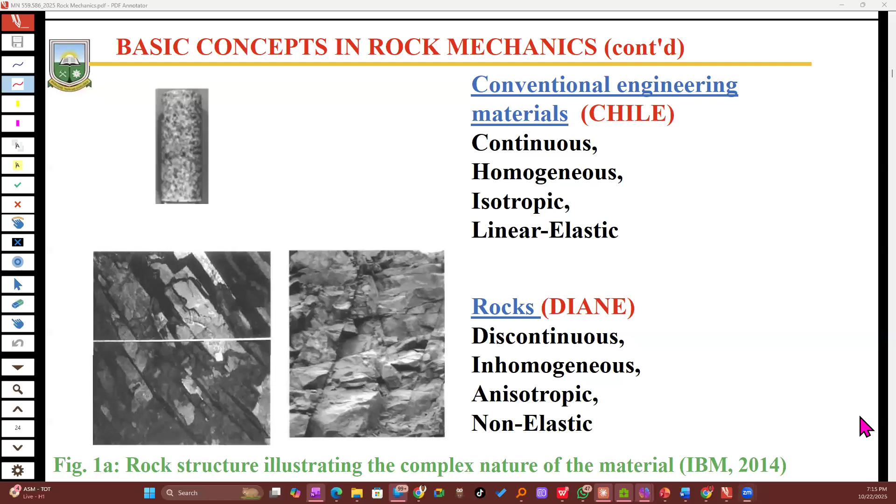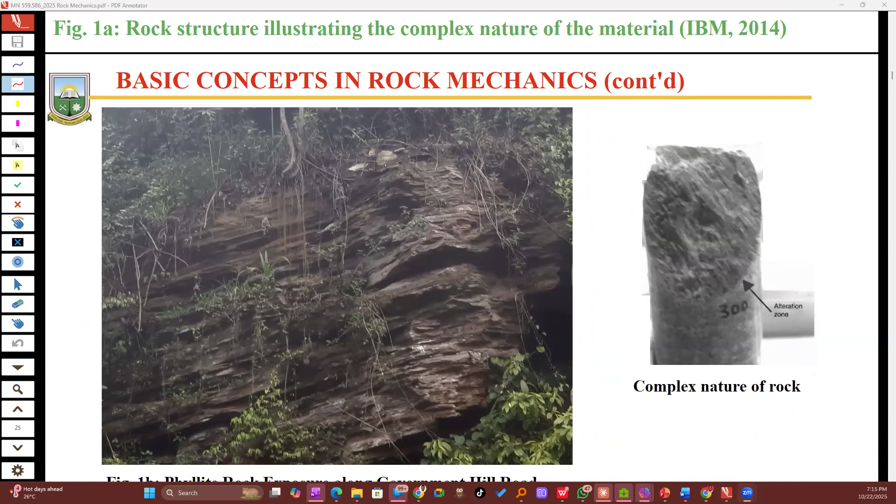This is also a typical image of an accessible rock. That is, if I have any rock mass that is exposed, such that I can get close to it and examine and see what the properties are.

So now, once we are talking about rock, we've talked about how it behaves and all that. It'll be very interesting for us to get to know some of its uses. Can anyone help us mention some of the uses of rock? You tell me one, then we move to the next person.

Who will start? One use of rock. For construction, Doc. For construction - you see, that is the issue. Assuming I request for 15 marks and you just say construction, what can you gain from that? There's a lot within construction, so if you just say construction, you've lost the rest of the marks. So be specific.

How will I say it, Doc? The use of rock for road construction - they use boulders for dam construction, for filling routes and other muddy places, for concrete works, for rock manufacturing base, for tiles, aggregates for road base, cement aggregate manufacturing.

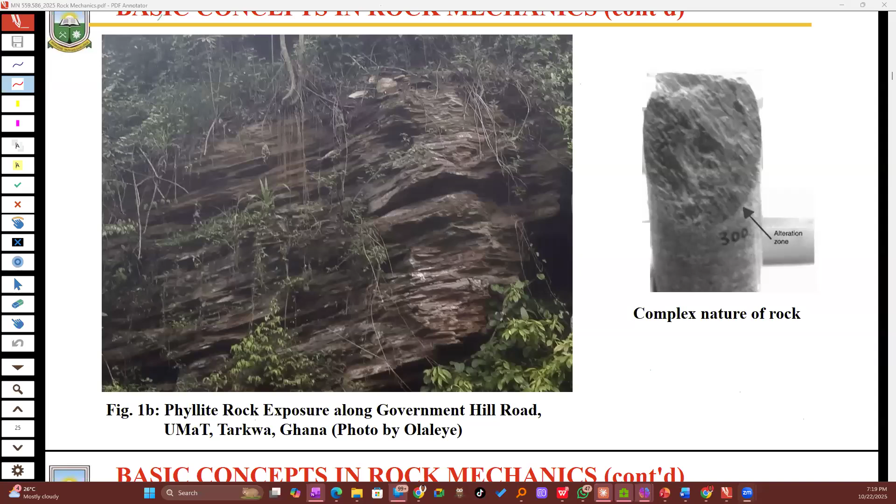So in agriculture, we add rocks to the soil to reduce acidity, like the lime rocks. Okay, good one, nice. Doc, some rocks can be turned into useful metals - beautiful, good. Then the preparation of sharpened knives - nice one. Thank you so much.

It means we have various uses for rock, and we've been able to exhaust almost everything I have on this slide. So we move on to the next one, looking at the economic benefits of rock. Who can state some of them?

Mineral - so we obtain minerals from rocks. Which other thing can you mention? Tourism - we earn money from that. What else? Aesthetic. Doc, sea defense. We are looking at economic benefits, importance. Mineral extraction, which we sell and then earn from it. What again? Quarries.

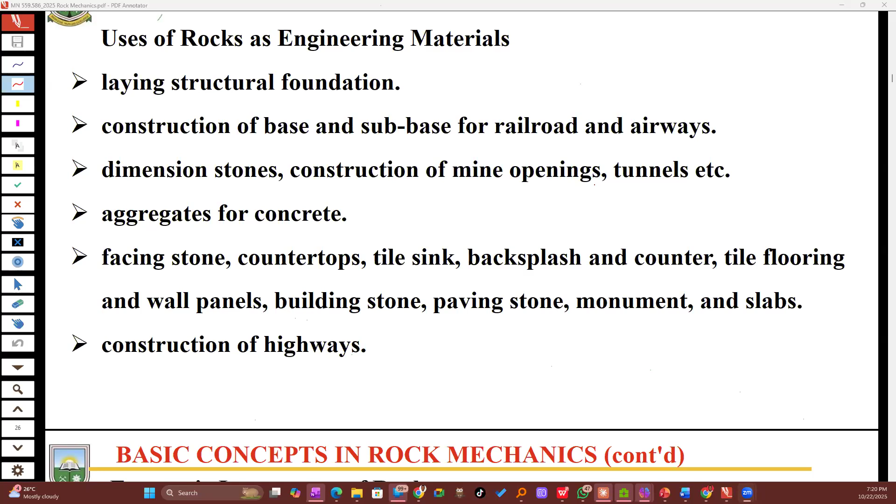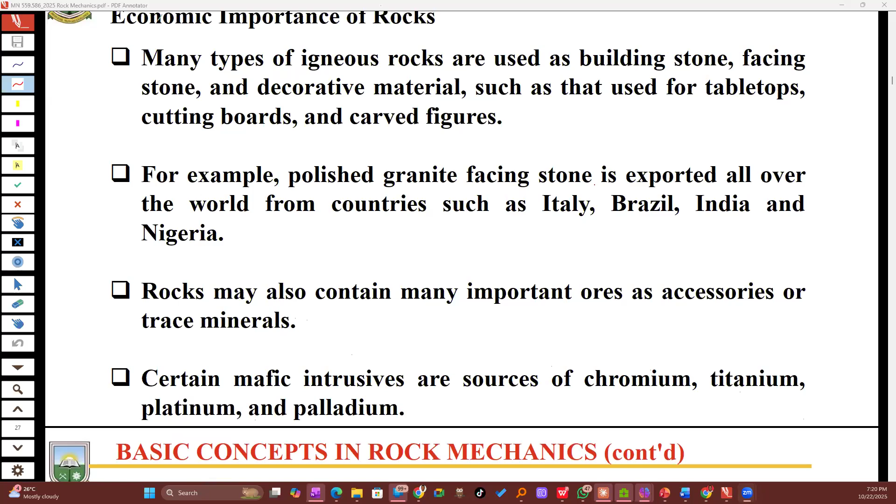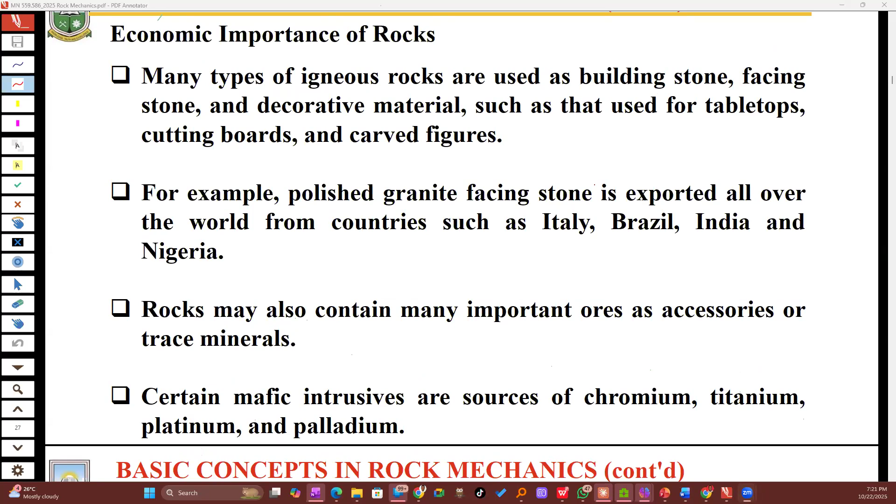So we are looking at the various rock types that we can use for varying things, like someone mentioned, for its beauty. Doc, can I say something? Yes. It also determines the financial ability of that geographical area. Yes, it's true, good. Then sometimes when we extract minerals from it, we can sell these and then earn royalties as a nation from it. All of these things are economic benefits.

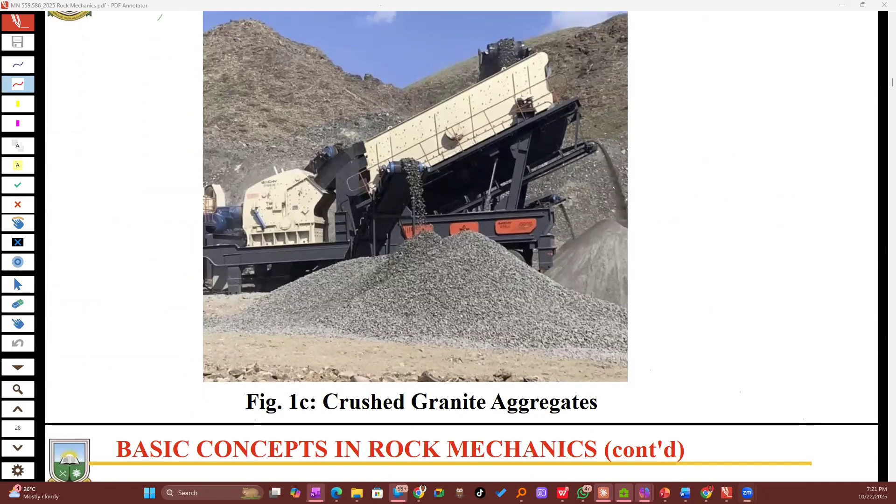It provides us with some employment, just as many of us, for which reason we are inside this class now. So these are some rocks, granites being crushed into finer aggregates for use. These are other uses of rocks - you see them, there are many, tons of them.

And that is what we can term as the intact rock. So when you are far away from the rock material, or looking at a larger area of the rock material, there are so many features you can see. Please mute yourself if you are not talking to us.

If you are looking at a wider view of an excavated surface, you will be looking at all the physical properties that define a particular rock material. You will see them. But as you narrow in deeper and deeper, you will be able to single out certain portions of the rock that have no discontinuities at all.

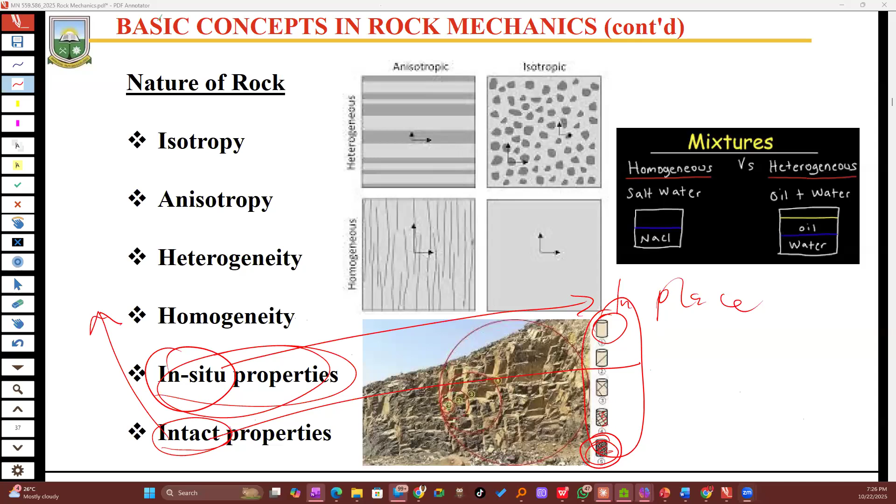All right, thank you, Doc. So we move on to our next topic.

What are some of the things that can define or determine the strength of your rock? The very first one is mineralogy, the various minerals or elements we know that exist. For example, if we mention the first 20 elements, or some of these minerals, every one of them has certain peculiar features.

It is these features within them that give us the various types of bonding that exist in the material. So when I have an element or rock material made up of minerals that are already competent by nature, if such minerals come together to form a particular rock type, then of course we need to be certain that we are going to have a very competent rock. So depending on the type of mineral making up a particular aggregate to give us that rock material, the strength might vary.

Then we have the mineral assemblage, how these various minerals came together.

Sometimes due to their orientation, whether they are rounded or not, their assembly can also influence the strength of your rock material. And then their particle sizes—are they finer? If they are very fine, at the end of the day, it gives you a very solid rock, free of so much void or empty space within it. So the strength of the rock is enhanced when you have finer particles.

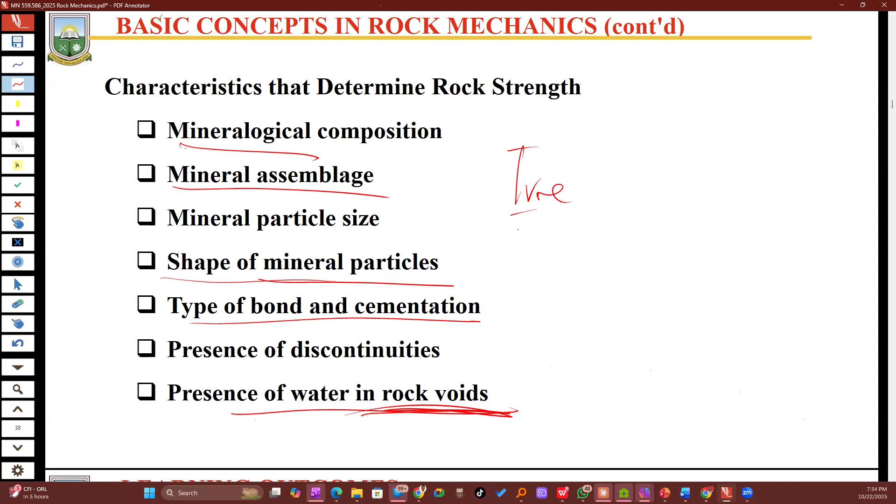So we are moving to our next phase - I think we should have ended here yesterday and we didn't. With the next set of slides, I want us to look at how rock mechanics programs are being implemented, what goes into it, and then the field application of rock mechanics, which I've already mentioned a few.

Doc, I have a question. Yeah, carry on. Doc, I want to know the difference between the mineral assemblage and the type of bond.

So mineral assemblage here could be if I have different types of minerals coming together - maybe I could have a particular rock type. Let's mention any elements in the periodic table coming together to give you a particular rock type. Remember we said certain rock types come together as a result of molten magma or whatever that have transformed to give us a particular mineral. So if I have a particular rock sample, let's say it's a dolomite rock, I have calcium present in there and I have sulfur in there - all of these are minerals coming together to give you a particular rock type.

The way they are assembled, the type of minerals that assembled to give you that rock type, can affect its strength - that's what we mean. And the type of bonding is, once I have that amalgamated type of rock with several elements or minerals present, that is now one piece of rock. I have a different type of rock that is also formed differently, and when they come together, that is bonding.

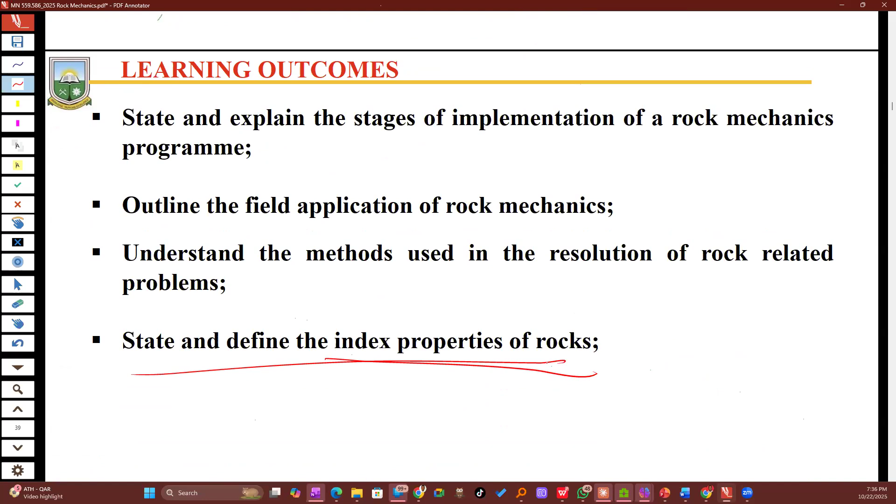I said we would then look at what we call index properties of rocks, and this is where the game will start, into our calculations.

The engineering problem posed in all structural designs mainly is the prediction of the performance of the structure under loads that are being imposed on it during its prescribed functioning. So if I say there's a problem, what is that engineering problem? I am trying to look at a particular design - it could be the stope you have designed, it could be your benches you designed and told us we should excavate the space like this to have our pits. That is a structure that you have designed.

So the problem here is us trying to find out, to determine, predict how well this particular design you have proposed will perform. As an engineer, you are trying to see how the design you proposed is going to perform in the presence of your excavator on that bench, excavating day in and day out, the blast you will be throwing on another side of the pit, and then the various activities going on with the dump trucks.

These are the loads we are talking about - we are trying to predict the performance of a design under all of these circumstances. The moment there is that trigger, you won't sleep, you will want to find out. So a problem has arrived, and you will then want, as the geotech officer, to do your various investigations to find out why. So rock engineering is concerned with the application of the principles of engineering mechanics to design the rock structure generated by mining.

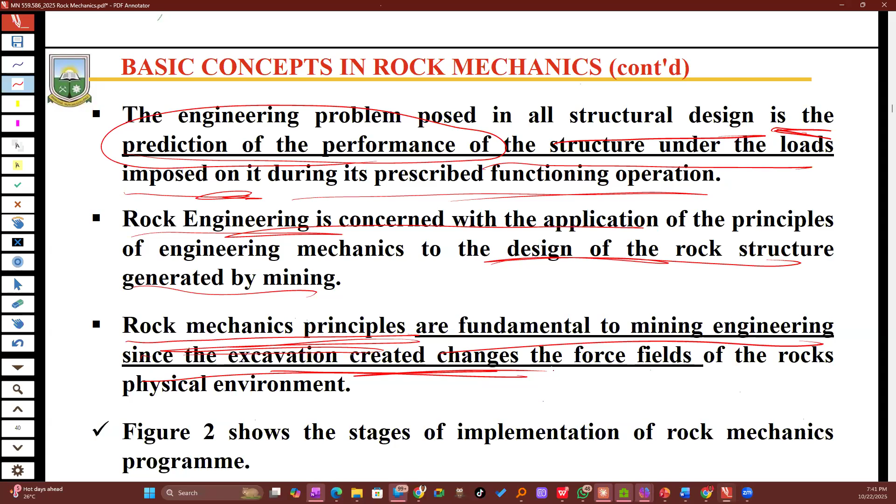Because we want to look at this and resolve some of these issues, we study rock mechanics and apply those principles to mining engineering, where our excavations will be causing disturbances to the various force fields that exist within the rock in its physical environment.

So if I want to implement a rock mechanic program, how do we go about it? To implement a rock mechanic program, it goes through five phases: the first is site characterization, next is model formulation, then design analysis, then rock performance monitoring, and then retrospective analysis. We'll take these one at a time, and when we get to the other slides we can brush over them.

I'll explain site investigation here. It's just like trying to set up a business - you go out to find out, will this business be lucrative? Will people patronize it? Who will be interested in this thing I'm trying to propose? When you study the market or do that market analysis, you are doing site characterization - bringing together all the various entities and properties that you think will favor the idea you have.

Translating this analogy to your rock you want to mine - during the very early stages when diamond drilling is going on, we don't throw away the rock sample. We pick these things up, take them to laboratories and test. The geologists will be around to characterize, together with geotech officers, to help us characterize the various properties we've seen. Once the core is out, we examine and study: at what depth did we see a crack? Is this crack going to extend north, west, or deeper? You want to investigate all these properties, and that defines the various types of rock that you have.

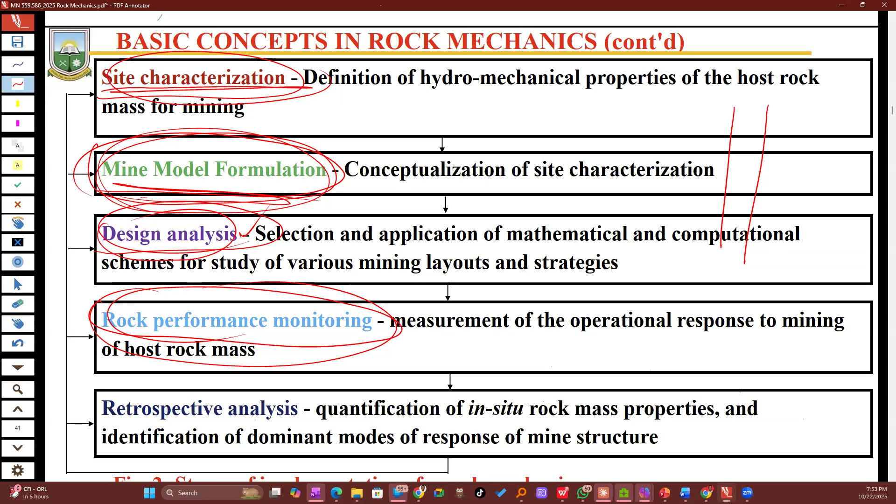So we are here. What are the objectives of a rock mechanics program, or rock mechanics? Why do we need to study rock mechanics? So irrespective of the excavation technique you are adopting for your ore extraction, it is possible for us to come up with 4 key things that will direct us.

So the very first one, why we do rock mechanics, is to ensure the overall stability of the complete mine structure, as defined by the orebodies. So the stability of the entire structure is our core goal, and these things are defined by where our ore is, where we have mined and created empty spaces, and what is the nature of the adjacent country rock present. So you are focused on overall stability, taking into account all these factors.

Then the next one, it's your duty as a geotech officer to study rock mechanics and help us safeguard all our major service openings throughout the designated life of the mine. So if we have created a portal where we enter a decline, we expect that so long as Gold Fields stays, so long as Tarkwa mine is there, that access route should stay because it is our main entry point into our production phases. We don't expect that we finish and tomorrow, once we get in and come back the next morning, it's closed or collapsed. So it is your job to protect that.

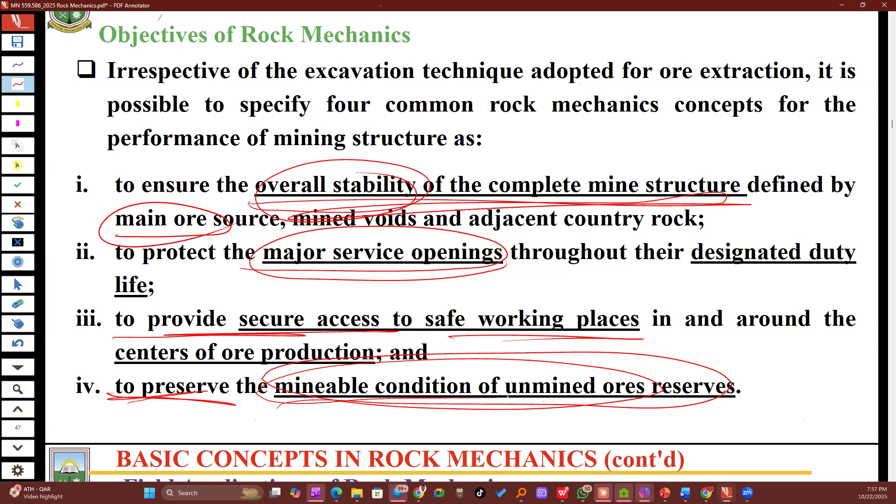So in the applications of rock mechanics, we want to determine the physical and mechanical properties of rocks. These are some of the things we do. We investigate the condition and stability of the area.

So every day you are there on the field. You don't leave your job to national service people or interns. If you do that, they will go and record 23 as 32, and you'll use that for your records. Of course, if you do that under supervision and have foresight of what is happening, you can detect outliers and make proper decisions. But where you relent on your job, at the end of the day, you will mess up.

Then you study rock pressure and its occurrence in openings - it is your duty. Then study rock subsidence and its effect on the opening: what is the tendency of subsidence in the mine or opening you have created? And then study the processes of fragmentation of rock during excavation. So you visit the face when excavation is going on to see what is actually happening - it can give you an inferred idea of what to do.

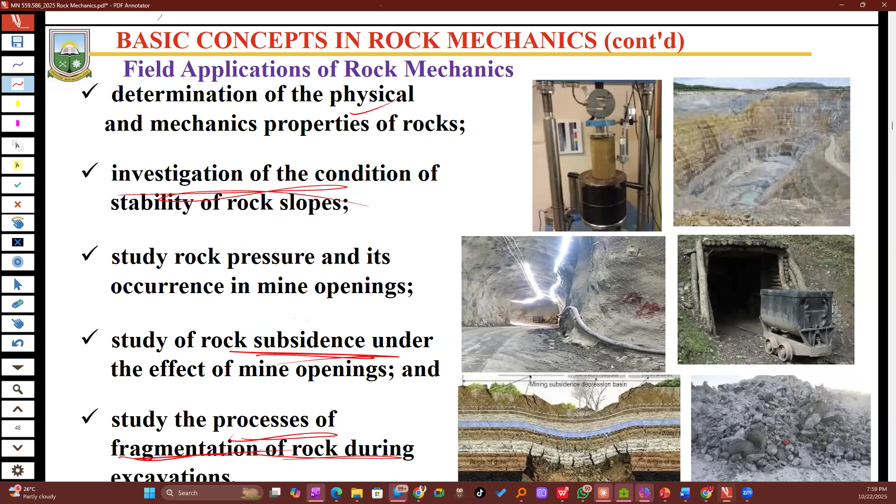So how do we resolve rock mechanics problems? The first one is through experimental methods - experimentation. We observe the behavior of the rock during production stages, then make decisions when we get to the office. You can also go there and look at the behavior. We conduct certain tests, termed the physical and mechanical properties of the in-situ rock, on site. Again, we can determine the physical and mechanical properties of the rock by taking samples to the lab - that is also experimental.

Then we study the physical and mechanical properties that take place in layers of rock and the effect of the mining process. Sometimes, just like this bottle has distinct lines around it, an excavated surface can have distinct layers. It is your duty to see how each of these layers differs from the other - layer 1 will have different behavior and conditions, and layer 2 will differ. So the condition of one side of the pit will differ from another side if it behaves this way. It is our duty to do experiments on each of these rock layers and make decisions.

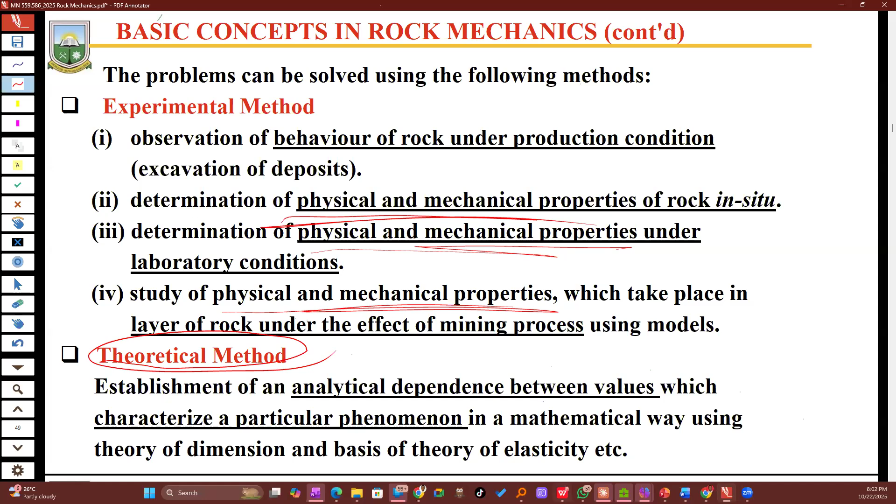But then, the moment you are able to find the underlying differences, the principles and assumptions they used in designing that software, that will stem from the maths that you have studied. That is the theory we are talking about. So we move on to the next phase.

It is getting interesting gradually. Any questions so far?

Okay, nice one. So, indexing. What is index property? Index property here is a system that is in place to help us find out, based on certain key things. They are more like properties that we have, a naming system available for us to test one by one, parameters that we can take one by one.

Depending on a particular project we want to undertake using our rock or soil, we then say, based on this project, maybe I want to create a platform. Your manager tells you we want to move our mine planning office or technical services office to this side of the mine. So at that moment, we need to carry soil, transport soil to that place, get some rock samples, prepare the land, overlay it with soil, and then place our machines. Based on the type of load you'll be dealing with, it will inform the type of soil you'll be interested in for the load and haul team bringing to that site.

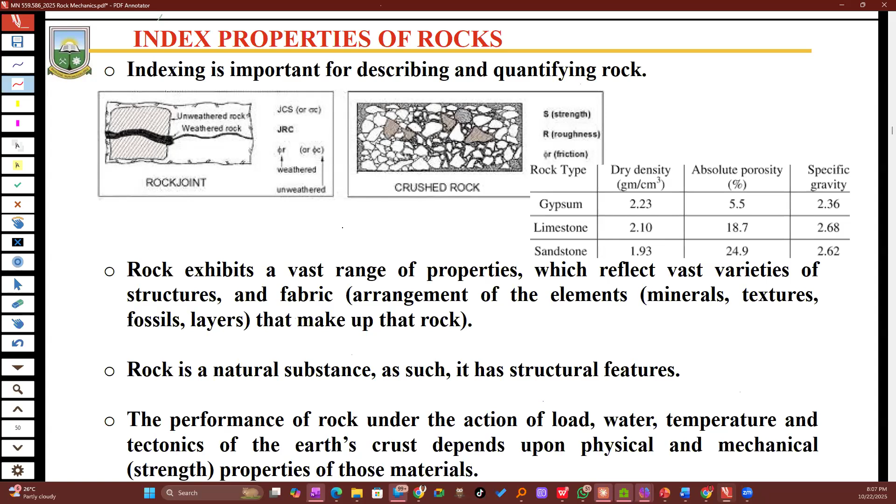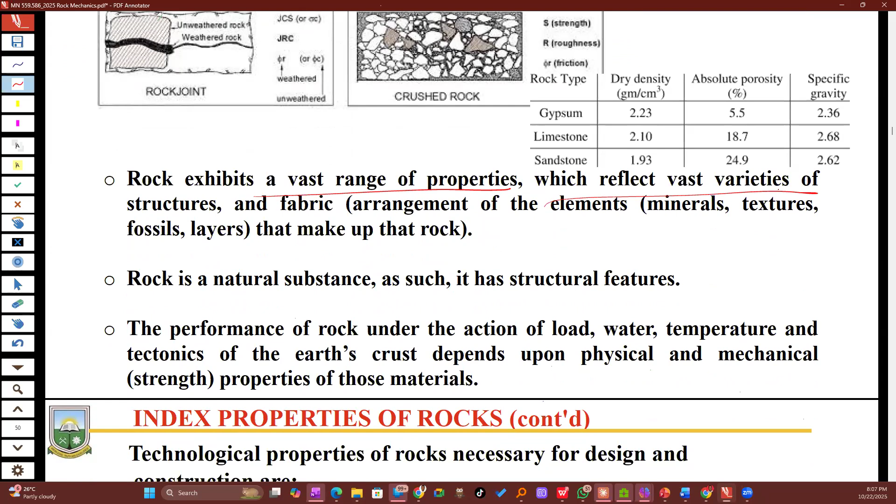Rock exhibits a vast range of properties, which reflect a vast variety of structures and fabric. Fabric refers to the arrangement of the various elements that make up a particular rock type. The rock in its natural state comes with several features, properties and parameters, which we have to bring together one by one. When they all come together, that's where they will make sense to us.

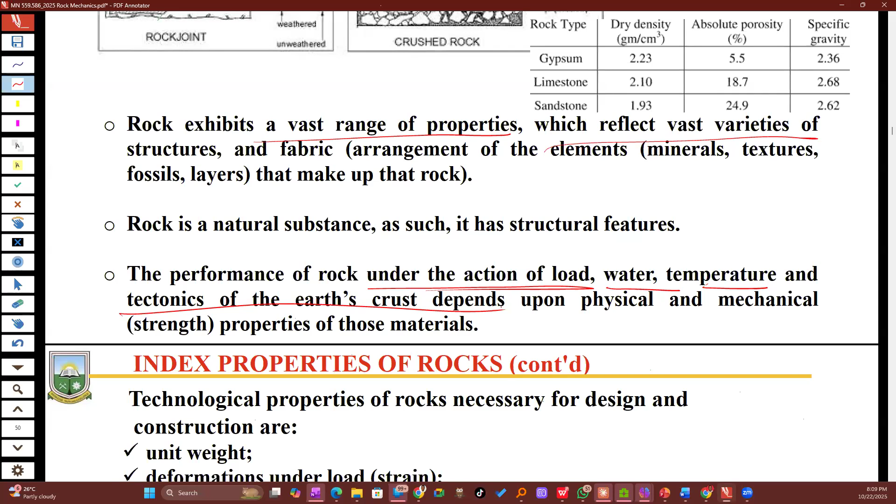The performance of the rock under the action of load, water, temperature, and tectonics of the earth depends upon the physical and mechanical properties of the rock material. How your rock behaves when load is applied depends on its physical nature and then its mechanical nature. The mechanical nature is more about the strength components of the rock, that is, when I exert force on it, what will happen. You intentionally exert load on it to see what happens, whereas the physical property is more like observing it, and using that as a criteria to slash certain things off even before you start the serious business.

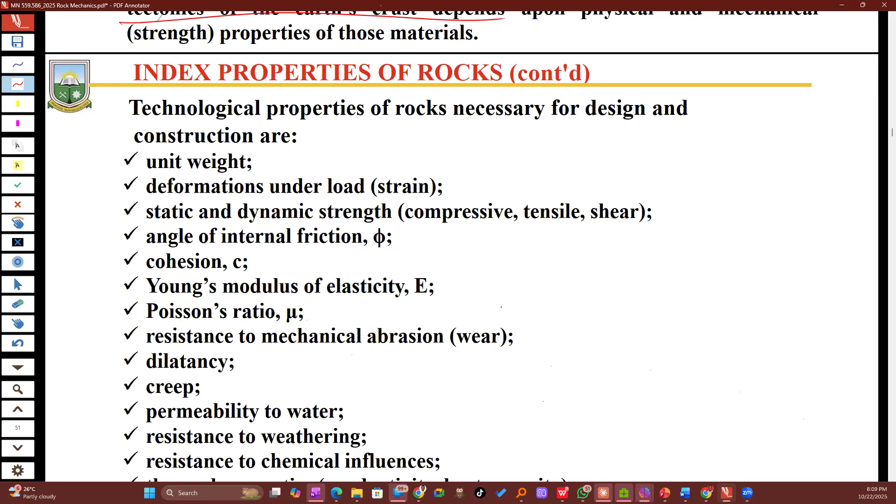These are all things that define the properties of a given rock material. There are many, so we'll pick them one at a time and describe where there's calculation, and go along. We are categorizing them into physical and mechanical, starting with the physical properties.

The physical properties are the properties exhibited by rock as a result of its inherent characteristics. Physical means they are more like inborn, they are inborn of the rock. So I see you and I know you are fair or dark, these are things I don't need to conduct a test to see. I fetch or pick rock samples and if they are wet, I can easily tell that they are wet. These are things we term as the physical property.

Depending on the characteristics of how they were bonded, rocks can be classified as being hard, soft, or loose. So the type of bonding that exists between them lets us identify whether they are hard, soft, or loose.

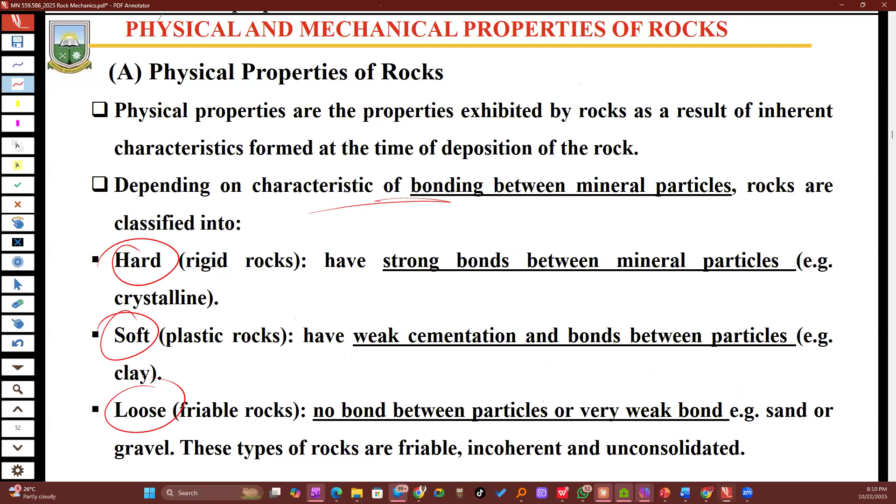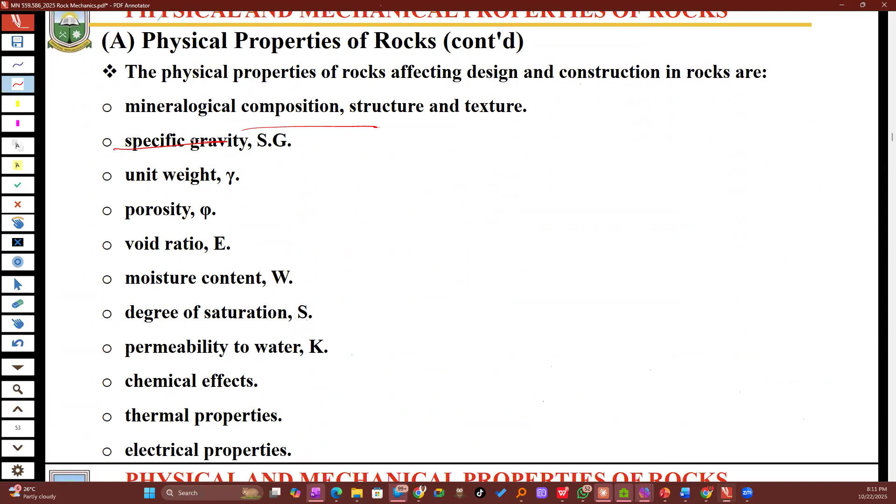Then we have the physical properties. You saw that long chain of properties of rock generally, and now we have divided them by looking at physical, and then we will look at the mechanical part of it. The physical properties stem from the mineralogical composition. We are looking at specific gravity, all through to electrical properties, which we shall pick one at a time and talk about.

The very first physical property we want to talk about is what we term as moisture content. In other books it is termed as water content. What is it then? We are interested in finding out, with this rock material brought to the lab, how much water is inside the sample. The amount of water present in a particular rock sample is what we term as moisture content. When we pick the sample and determine the amount of water that exists in it, we term that as the moisture content, and it is expressed in percentage.

It is the ratio of the volume of water to the bulk volume of the material. Bulk volume is, if you brought a material, let me put this in here and cover it up. Assuming you brought this to the lab for us to test, this is the sample you brought, so this is the bulk. If I go ahead and calculate the volume and mass of it, I am calculating the bulk mass of the sample and the bulk volume of the sample. So the bulk refers to the whole sample as it is, without doing anything to it.

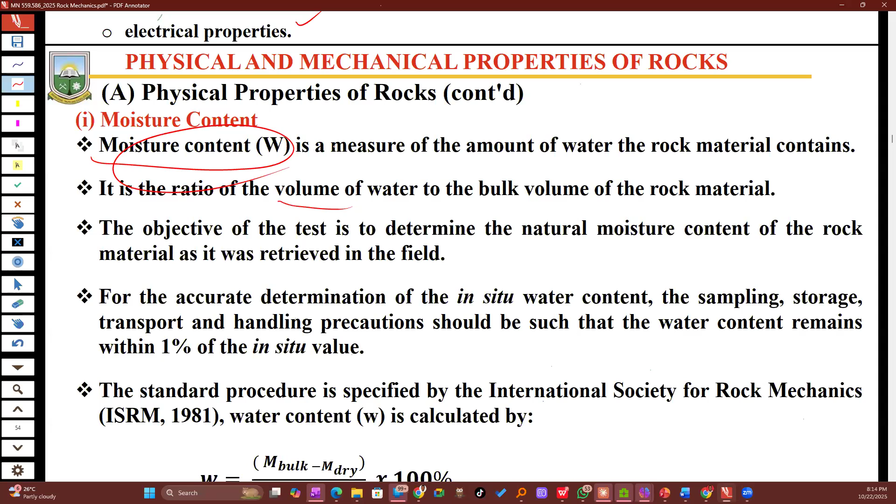Then we have another thing called specific gravity. Specific gravity is more like a measuring tool that helps us determine how heavy something is in relation to water. So I want to determine how heavy this mouse is relative to the weight of water.

The assumption here is that water is a standard material that doesn't change at a particular temperature, irrespective of your location in the world. So we are using it as a relative measuring tool, knowing its mass. We want to compare all other material to it. And we know the density of water is 1 gram per centimeter cubed.

So the moment I pick any other material and I know the density of that material, let's say it is 3, already I can say this is heavier than water. So the moment I put it inside water, it will sink. Specific gravity helps us determine the relative difference, or how heavy a substance is.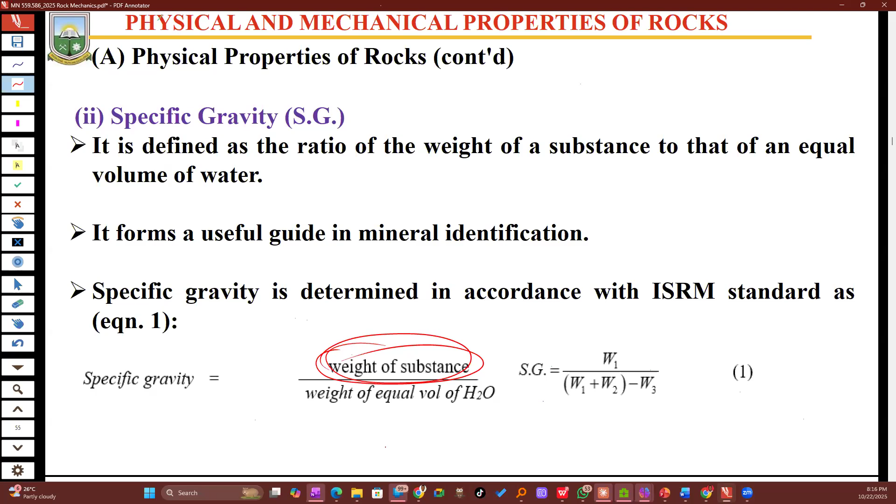And how do I get that? I need the weight of that substance. The moment we say weight, it means we are considering acceleration due to gravity as an element here. So it's the weight of the substance over the weight of an equal volume of water, and that gives us specific gravity. It's the same thing we are using this bottle of water to determine. So if I have the density of an object over the density of water, again I am getting specific gravity.

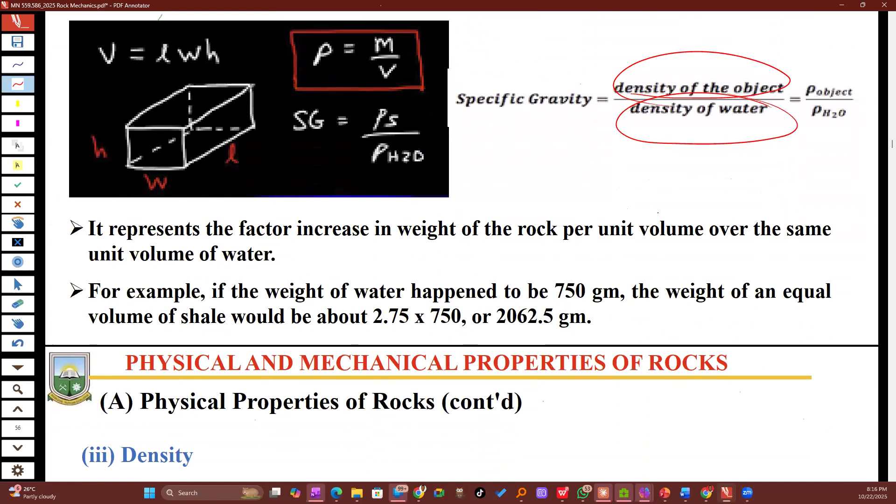Then we have another... Hello? In specific gravity, why do we ignore the pore spaces?

The pore spaces - you are looking at density. If you are using the volume of water, or the weight of water, or the density of water, depending on whether you are using bulk material, the pore spaces are present. So we are looking at density, and density could either be the dry density or the bulk density. So it doesn't specify whether you are using it with pore spaces or no pore spaces. That's what's happening here.

Yeah Doc, you made mention of the density and mass, and also that for specific gravity we use the weight. But I know from the various lab measurements, the in-house specific gravity we do, we rather use the mass, we don't use the weight. So I said you can use the weight, and when you are using the weight, it means you are incorporating acceleration due to gravity. I emphasized that. Are we clear? Well noted. Good, well noted.

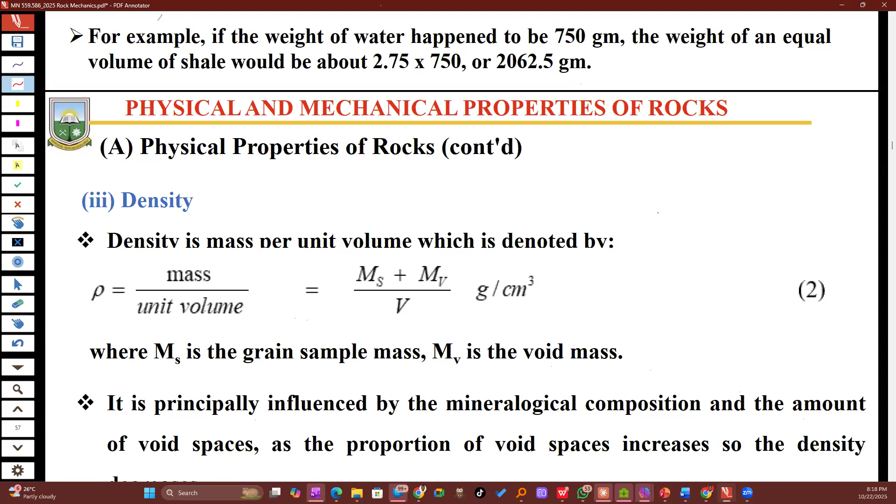Then we have another thing called... density. What is density? In simple terms, we have been saying it is the mass per unit volume of a substance. But what is it really? Let us try to make it quite simple and self-explanatory.

Density is just interested in how packed a substance is. So assuming I pick this box again, and assuming this box is filled with sand or it's a rock type, I want to find out how packed this particular substance is in terms of its packing behavior.

So if I cook 1 cup of rice and then ask a friend to come and just fetch a ladle, depending on the amount of pressure the person uses on the ladle against the saucepan, the quantity of rice will vary from another person's ladle. So we are looking at the packing behavior of the tiny, individual particles that make up a particular substance, and I want to know the solids part of it against the volume of that substance - the mass of that packed material against its volume.

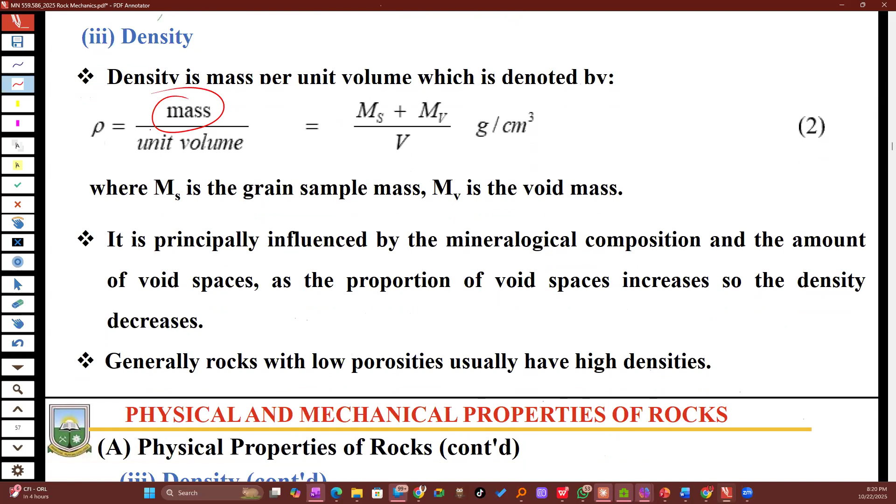So the types of densities that we have: bulk, saturated, and dry. I want to add the dry to it. So I'll pick them one at a time and explain. I am starting from what I know you will know. From there, we get to the others.

So let us start from the dry. When we say dry density, using the same analogy, I have this. The black substance in here is water as usual. It hasn't changed. And this is a container, which is a rock sample Mr. Kosa brought to us to test for him.

When you bring the sample, and I want to know the density of this substance, if I don't do anything to it, just as fresh as he brought them in the sealed rubbers, I just go ahead. What is the mass of this box? I didn't do anything. I just weigh it. Pick my tape and check the volume of it, the length, the breadth, and the height. I calculate and I get my volume.

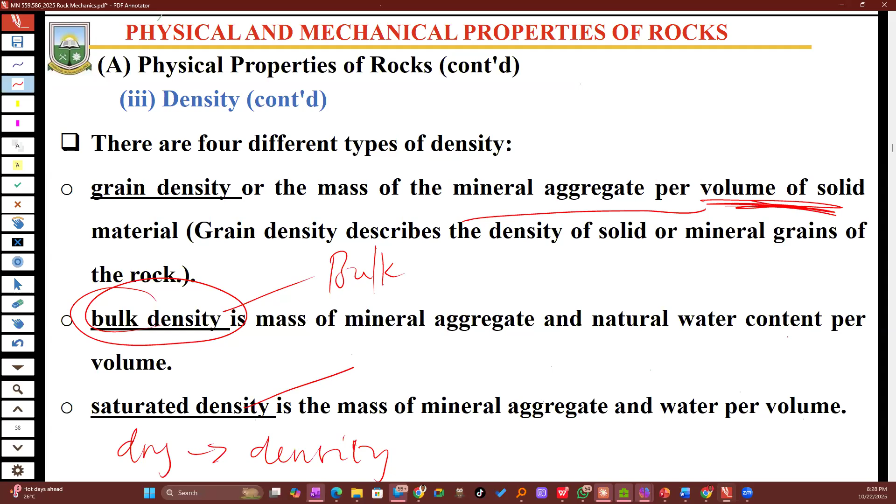So you check your water content. If where I am going to use this material is already a waterlogged area, I don't expect you to bring me a substance that already has about 50% water inside it. No, I wouldn't be happy with that. So that's why we work on some of these parameters, or physical properties, of the substance.

The International Association of Engineering Geology came up with a table that helps us classify and describe by words the various types of material. We have class 1 to 5. So if I have a material that has, without water, a dry density greater than 2.75 megagrams per meter cubed,

then this type of material I'll say is class 5 material, and I will describe it as having very high density. When your material has a high density, it is a trade-off: it means it has less empty spaces, so there won't be so much void space inside that substance. So you have lower porosity, which is also a physical property we shall describe very soon.

And we have class 5 all the way to class 1. Class 1 is where your dry density is very low, after taking away the water and checking the mass divided by volume of your substance. Once you have that, you say your density is low. The trade-off is that you are going to have more empty spaces inside the sample, which leads to a very high porosity value of over 30%.

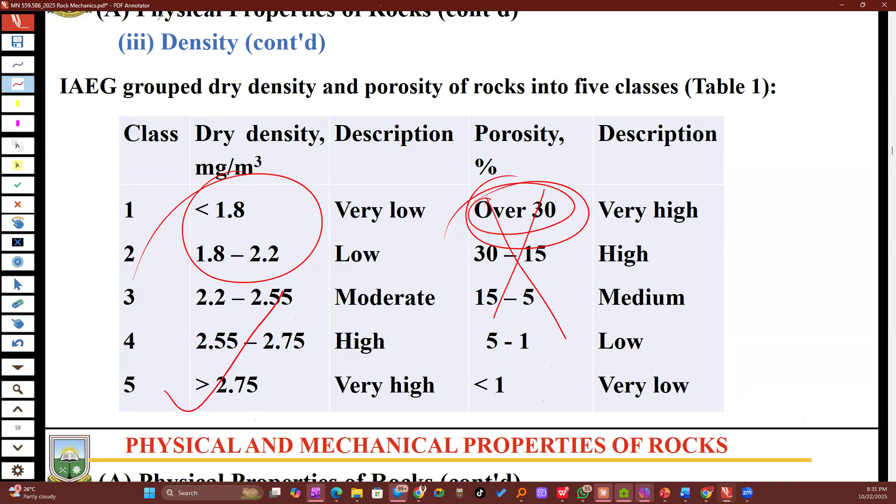Then we proceed. Density is used in various places, and we can also use another medium to determine density of a material. If we know the temperature, we want to determine the density of a material at a particular temperature - it is also possible. All we need is to determine the coefficient of expansion that exists when there's contraction and expansion within the material as it conducts heat and begins to contract. We want to measure that difference that always exists, and that is the coefficient of expansion of the rock.

If we get to know that, that is what we are putting here. Then, what is the density of the rock when the temperature was 0? We know that. When the temperature began to rise to say 30 degrees, what is happening to the rock? If we are able to determine the coefficient of expansion at that 30, then we can easily determine the density of the material at 30.

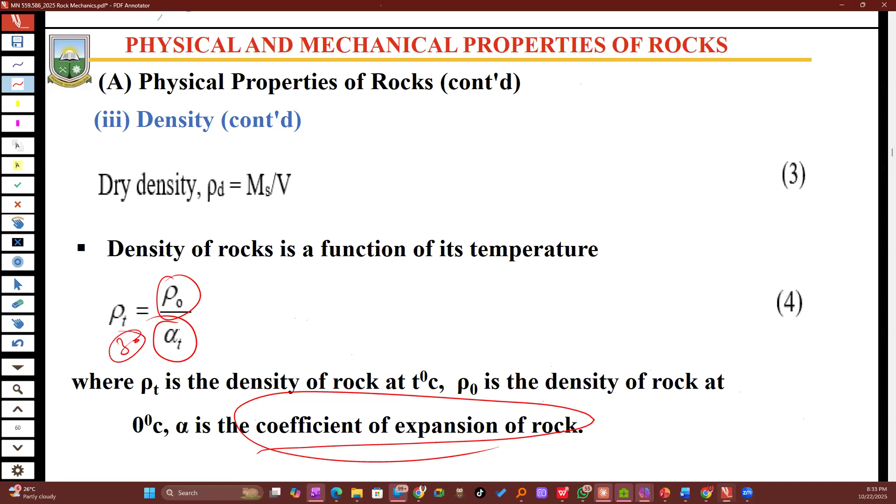So mass density, we know and have established already that density is one of the key things we use in determining the specific gravity of substances like our rocks, the various types of rocks. And so water already has this density, this mass density of it being 1,000 kilograms per meter cube, or 1 gram per centimeter cube, as the standard units for density of water.

Yes, exactly. Okay, so maybe this could be an error, but can you check that for me slightly now? So I'll go online and check and get back. And then get back to me.

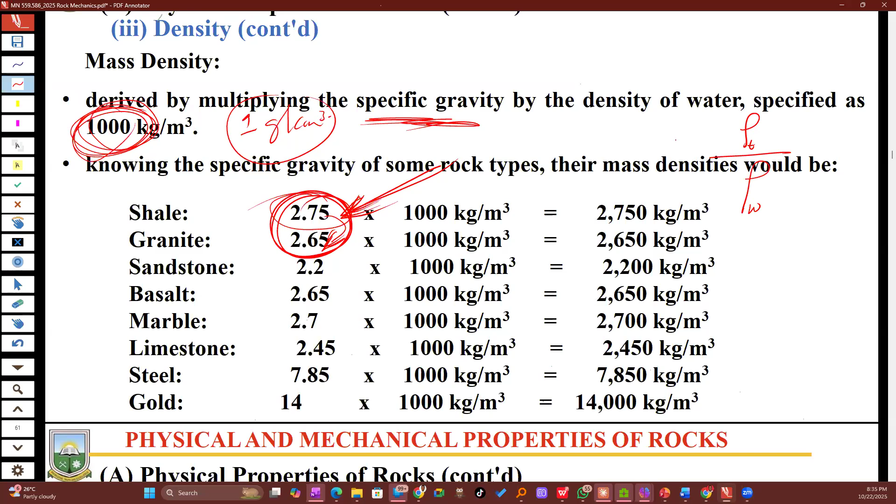Okay Doc. So assuming you have the specific gravities of various elements, you can easily multiply, because we said that if I have the mass density of a particular substance, let's say density of a substance called T, over the density of another substance, which is water here, that's the standard medium, it gives us something we call specific gravity.

So assuming I have something here called the specific gravity, knowing these two things, the SG of this T is going to be the density of the T over the density of water. This ratio is what gives you what we term as the specific gravity of that particular substance called T.

So it means that in the future, if I have any element T, and I'm not given its mass at all, but I know that the density of water remains the same as 1,000 kilograms per meter cube, it never changes, then if I need the mass of a substance, since I already know the SG of T, all I do is just multiply, and that gives me the density, which is the mass density of that particular substance. So it is the same thing we are trying to do here.

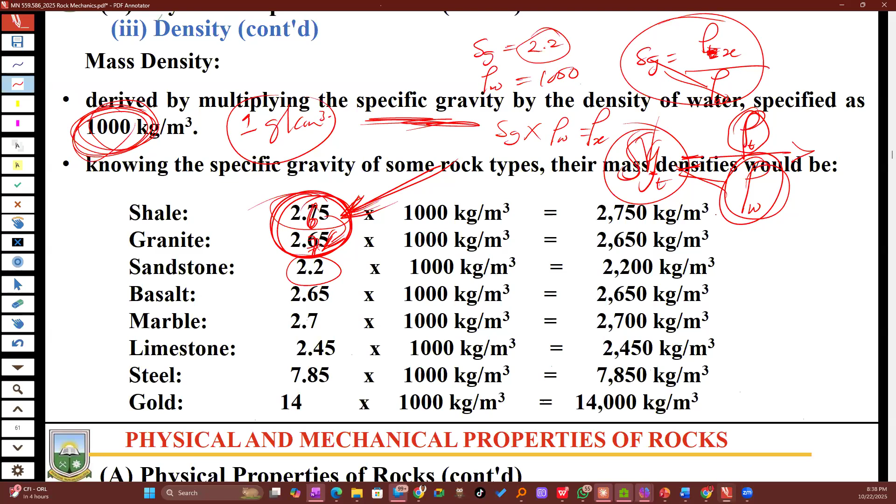It is the same thing we are doing here for an element called unit weight. Usually I tell students not to bother themselves so much, just understand unit weight as another form of density. But the only difference is that you are considering the acceleration due to gravity exerted on the substance. So it's like having the mass of a substance, and the moment you multiply that by acceleration due to gravity, it changes to what we term as weight. So if I want to know the unit weight of a substance, dividing this weight by its volume is what we term as the unit weight. This is used often in the construction field to check the material they move around.

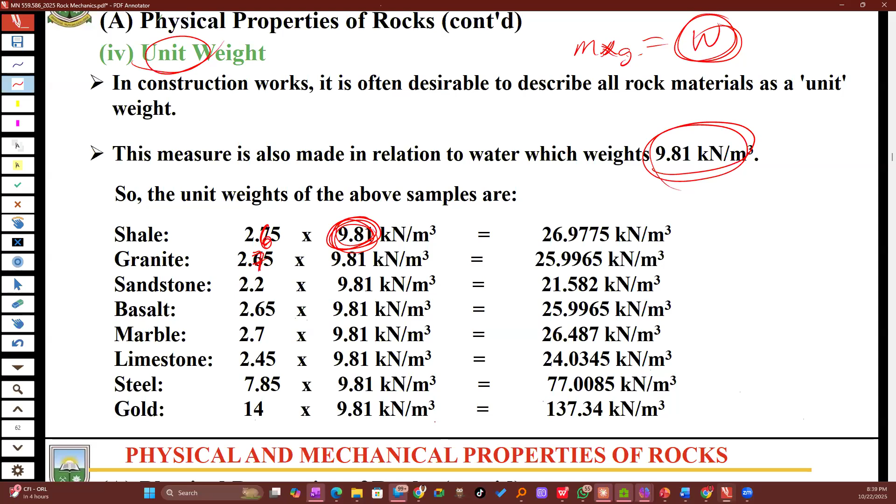And so with that one too, we can easily compute, which is the same thing repeating here. If I have the specific gravity of the substance, I can get the unit weight of the substance. All I need is to multiply it by the standard unit weight of water, which is a constant here. So the same principle we used for the SG approach is the same thing we are using here, and we get the corresponding values for them. So the higher your SG value, the heavier you are in relation to, or when we compare you with water.

Then our next thing is porosity. What is porosity? Porosity is also another physical property that seeks to find out how much empty spaces are present.

So you just want to quantify. Let's use this bread. When you buy a loaf of bread, they add yeast to it to create that loaf of bread for you. So you realize there are empty spaces. Take this box, for example. There's an element in it, and this element didn't fill the box up. There are empty spaces all over.

Assuming you have to quantify the actual portion of the soil or the rock, that is the particles themselves, you take them out and see what is the volume of this bulk material previously, and what is the volume of the solid material itself. You determine that, and dividing that by the bulk volume, you are getting what we call porosity. So porosity is the volume of the empty spaces over the volume of the bulk material.

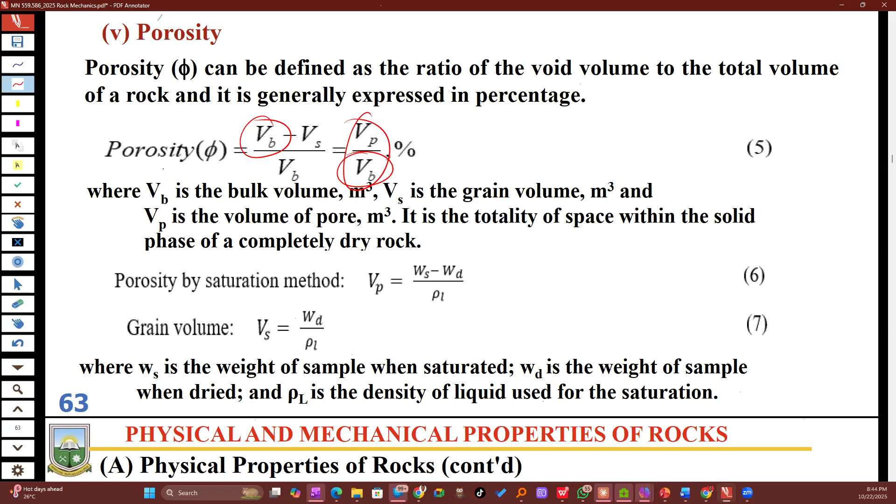Then we move on. So porosity can be described as highly porous. So when I have a material that has clearance greater than 0.1 millimeters, I'm looking at the empty spaces that exist within these substances. If they are greater than 0.1 millimeter in terms of their sizes, their clearance that exists within them. So the clearance here is, if I have a material where I see one pore here, and then another that wide, all over the substance, then the material is going to be highly porous.

But then if I have one that is between this range, I say it is porous. And when the spaces are closer to each other, such that you even find it difficult to tell which one is a hole and where is the next hole, then I am looking at what we term as non-porous material. Of course, every material may have that tendency, it is there, but it might be negligible.

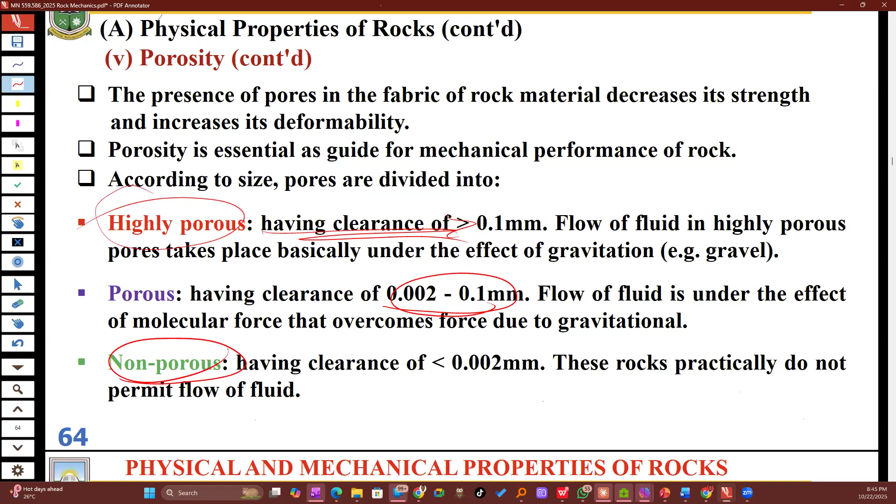Prof, why not less porous but non-porous? Because you are talking about the presence of pore spaces, but it's negligible.

This is what theory has for us, that we should call it non-porous. Because if you have a sample like this and want water to pass through it, you can wait days and the fluid will not move. So it is equal to it not being there at all.

If you try to measure this particular millimeter and then go 0.002 millimeters less, it becomes difficult. So it's just like it doesn't exist. I don't know if I've been able to clear that.

So Doc, are you talking about their wideness or how small the pores are? Yes, the clearance they give, in terms of the hole interval—the tiny particles or holes that serve as the empty spaces.

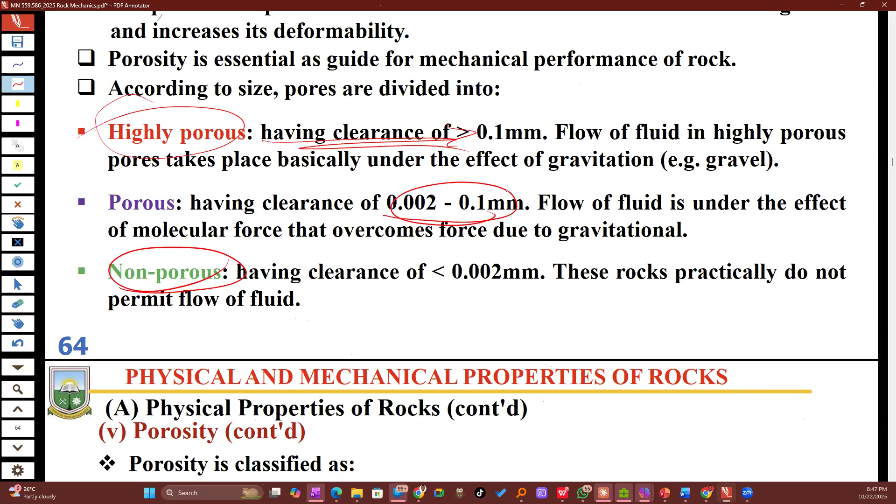Then we have something we call absolute porosity and effective porosity. In other fields they are interested in finding out—you know, we have pore spaces on the surfaces of our skin, true or false? True. But do we see blood coming out of it?

No sir. So you not seeing blood coming out simply means that the pore spaces there are not connected to the vessels or areas where blood is stored. Is this clear? That is why you don't see the blood coming out.

In the same way, I might have a rock that has empty spaces all over, but these empty spaces are each different from the other, such that they are not connected. I may see a hole here, another one here, have water stored here, but the water never gets to this side, because the hole here is not connected to the hole where the water is stored.

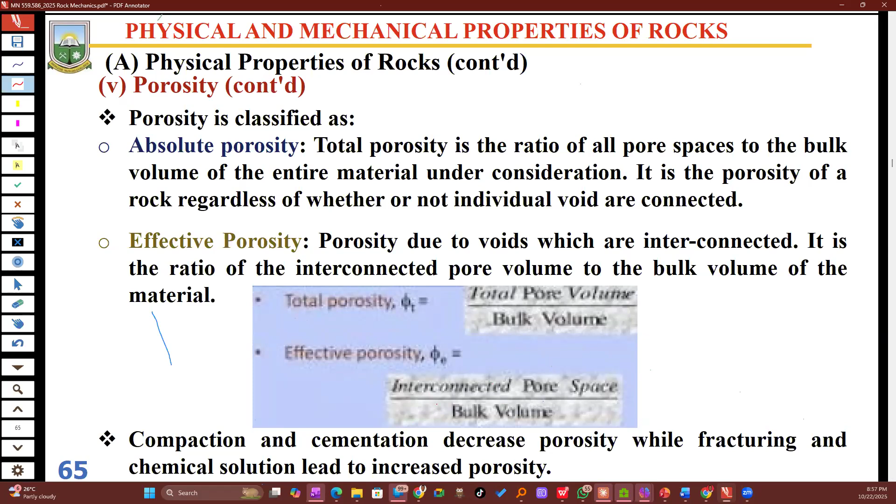Thank you very much for that addition. Well done. So this is it. Compaction and cementation help decrease porosity, whilst fracturing and other chemical reactions that may exist in any substance can also help increase porosity.

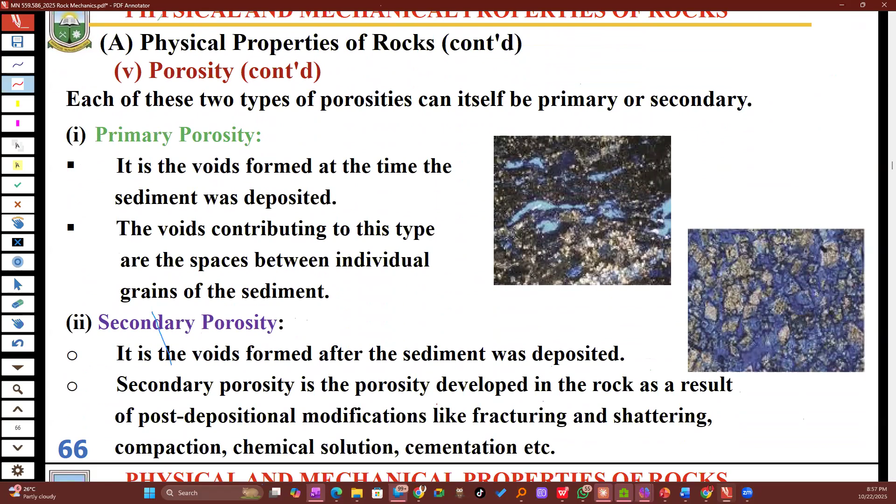So we can have primary porosity and then secondary. Primary porosity is when the rock or material was formed in its original location. Were there empty spaces in there? If there are empty spaces that existed when the material was formed, that's at birth - that is primary porosity. Then as a miner, you went there and did excavation, exhumed material, scattered and dislocated all the particles. Now we have a different type of material, but the material sitting there with void spaces - then that is a secondary porosity you've created.

So take it, for example, you are digging a hole, a manhole. Remember, we have all encountered this situation where you dig a hole, you want to put back your material, and then it enters, leaving excess on the side.

So at that moment where you have excess material on the side, what do you think happened? Because you excavated, you created a lot of void spaces that get occupied by air. That's why you can no longer fill that hole with the same quantity of sand, unless you do compaction, which expels the excess air you introduced. So where you excavate or disturb the material to create voids, it is secondary porosity you have caused.

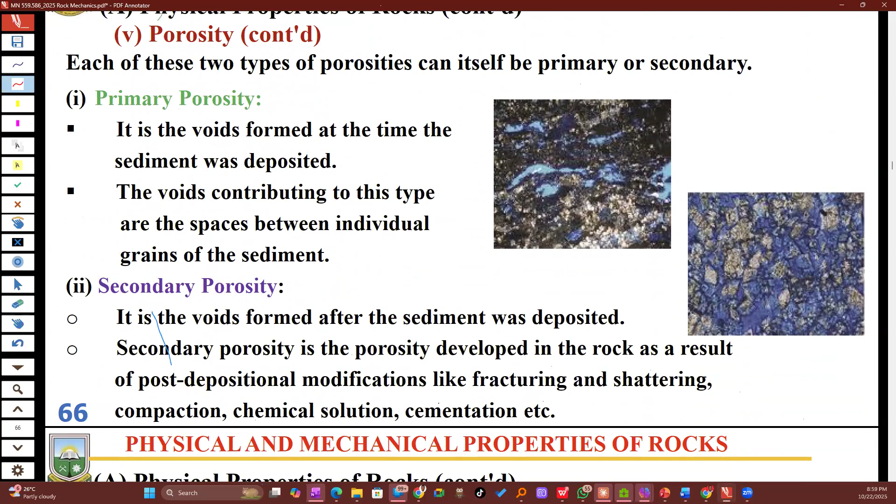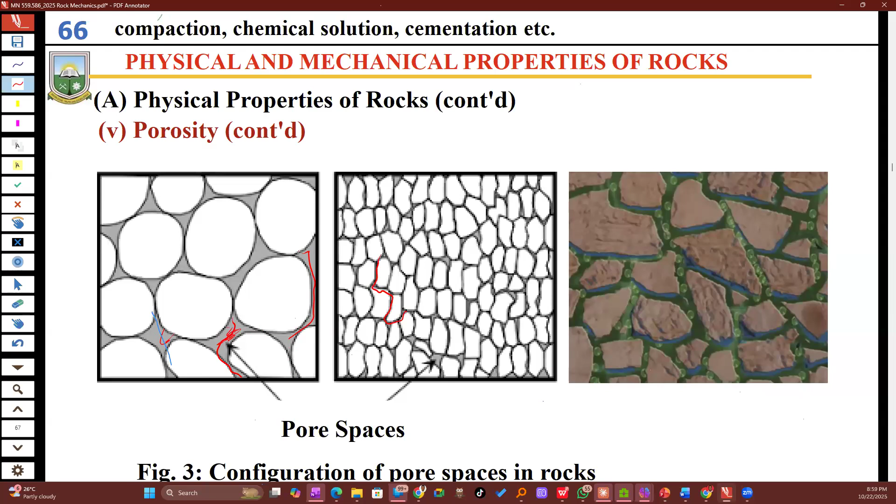So this picture shows the various pore spaces that exist within a material. You see, I have empty space from here to there, but when I come to this center, no connectivity. Then here too, no connectivity. But if water can indeed go through this, there should have been some space here, which there is. Then here, there is no connection. So we are interested in finding out which sections can permit effective flow.

We have certain porosity that occurs as a result of an individual pouring some chemicals somewhere—voids by solution. So you pour some elements. Let's say you want to mine salt, but you don't want to excavate, so you decide to use hot water, brine. You want to mine some elements, so you pour hot water with some element inside—that is a solution. It goes in there and causes dissolution to create voids, because what you've poured in is intentional and it attacks a particular element within the solid material.

As it eats into the material you're interested in, it's just like pouring cyanide onto an excavated pile of material, a heap. What do you think happens? The cyanide goes through the pile, trying to eat the gold element within, and before you know it, it creates empty spaces within the substance. It's the same thing here. So when I use a solution to dissolve something, and at the end of the day it leaves empty spaces within the entire body or medium, I have created a type of porosity called solution porosity.

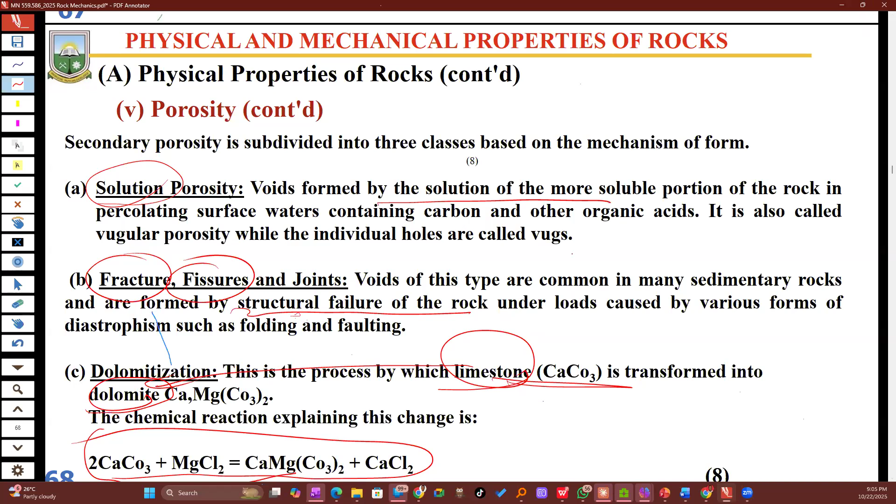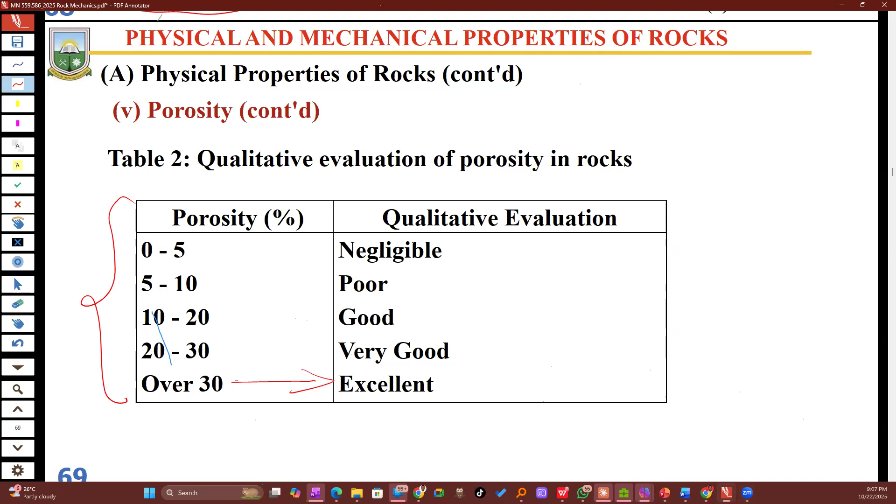Doc, please, does that mean this table is not for miners? This is not — this is a standard table provided by researchers. So we look at it and say that if these things are negligible, that will be our favorite part. I don't know if you understand it here.

Is it clear, Mike? Can you come again please? I said this is a standard table provided by researchers. It exists, but based on your application, with this classification you will be interested in the negligible and poor side of this table. Correct.

Doc, please, is it from physical observation, or is there a method we can use to measure and know it ranges between 0 to 5, 5 to 10, and so on? If you want to measure these things, that is the formula we saw earlier: you pick the sample, measure the bulk volume of the sample, then check the amount of solids present in the sample, and deduct that from the bulk volume. The difference is the air, the empty space. This is actually possible to calculate in the lab — you can do them.

When you are done, you express it as a percentage. So it simply means if I have this rock and I'm dealing with negligible, it means 5% of the whole volume of rock is empty spaces. Now imagine having this whole block of rock with 40% of it being empty spaces — that will not be good. You can't use it for any serious job at your workplace, unless maybe you are done with your road works and want some smooth material on top, so you go and pick them up to spread.

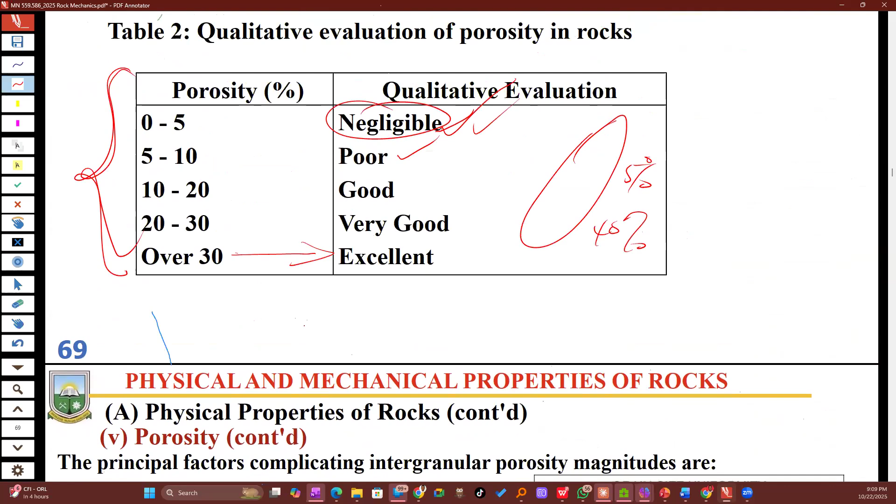We'll finish this now, and tomorrow, God willing, you'll meet my teaching assistant for calculations on all of this. He will take you through some of these things again to help you do computations on the various parameters and physical properties we've talked about. That is what you are going to work on with him, and then solve some examples. Once that is clear, we are then going to have our first assignment, which you will do and submit. The next one will be an online test — this one is going to be calculate and submit to me.

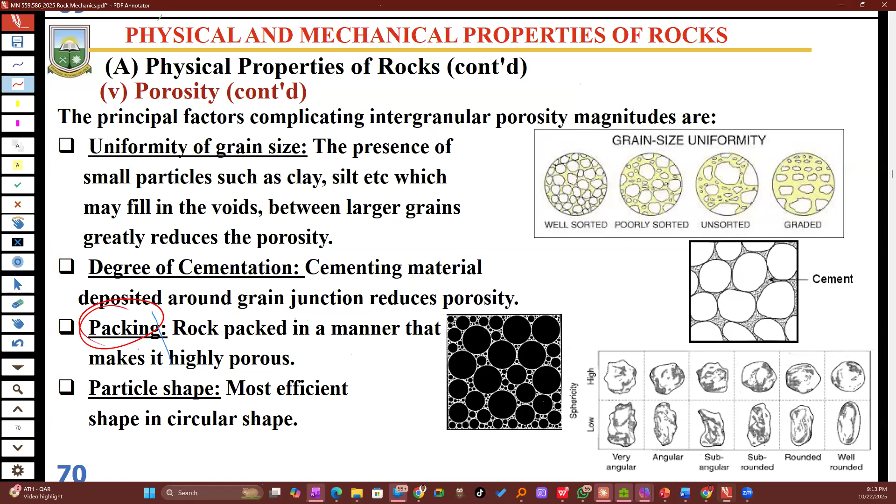It is short of some quantity, and so it is not well done. This shortchange in terms of the compaction is going to bring about porosity, either increase it or decrease it, depending on how much success you have with the cementation.

Void ratio, you are just interested in finding out. Now I know these are the empty void spaces inside the substance, as against the solid, the volume of the solid in the substance. The ratio of it, you want to know which one is more - is it your air or the solid?

So I buy a loaf of bread, check the volume of the empty spaces, just like we did earlier. What is the volume now? Squeeze it, take the solid out. The balance that is left is the volume of the voids. Divide that by the solid that you got.

If you do it and you are getting 0 point something, it means that your void spaces are quite less as against the solid. But if you do it and you are getting larger values, whole numbers, it means your empty spaces surpasses the solids.

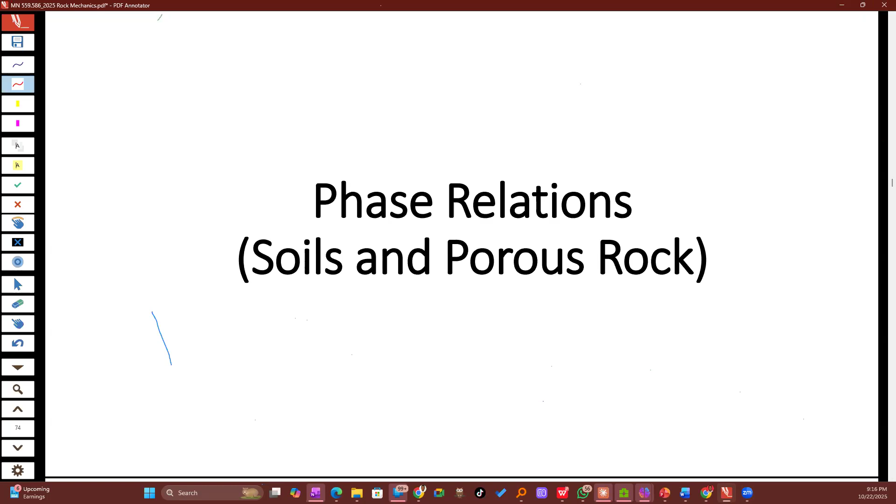Doc, using the bread as an example, that means that which bread is more porous - the sugar bread or the other bread? Exactly.